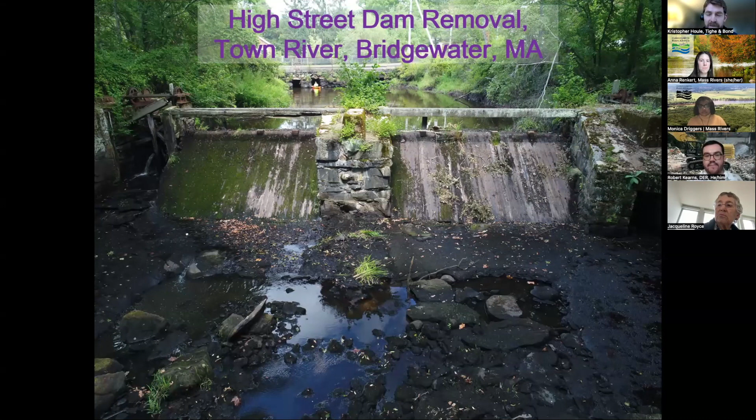Probably like many of you, when I was assigned this project early in my dam removal career, my first reaction was, how the heck am I going to figure this project out? This one had it all from a complicated infrastructure standpoint. It initially involved a willing dam owner and a strong NGO partner, but that was about it. The biggest challenge was in relation to the 1700s era bridge that was right upstream of the dam. Not to mention the building that is precariously located between the main and secondary river channels.

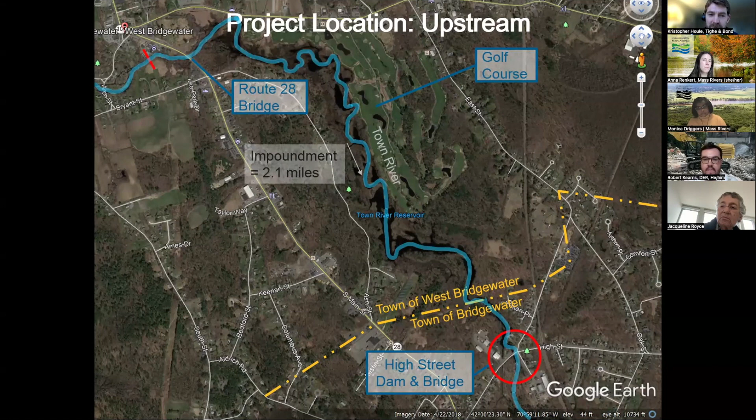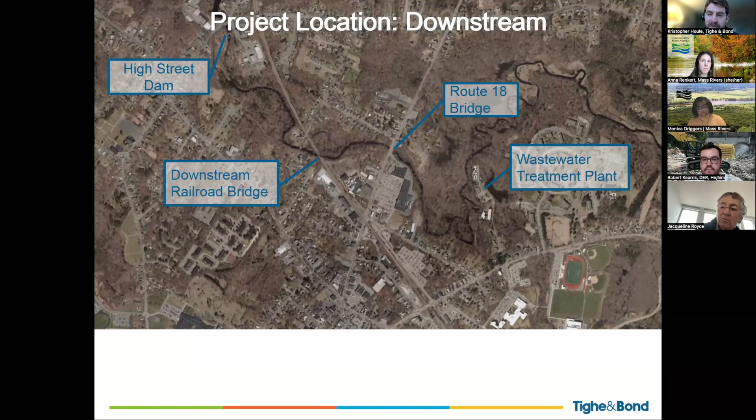In addition, there's a highly trafficked state bridge upstream within the dam impoundment, and a golf course that used water from the impoundment for irrigation, and that was just upstream. Downstream, you had more bridges, rail bridges, and the town's wastewater treatment plant that couldn't be impacted. So once again, this project had it all from an infrastructure perspective.

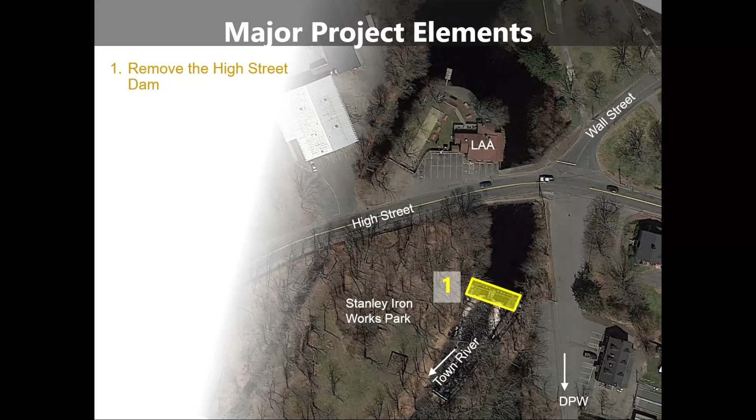So what I ultimately chose to do is break the project down into pieces and try to solve one issue at a time. Obviously, dam removal was the key focus from my perspective. That was easy. We had a willing dam owner, a private owner. They owned the business across the street, shown here with the white building. So access was well established here. We had access through the private property into the impoundment, as well as a town park and a town roadway and a parking lot nearby on the east of the dam. So access, in this case, that part was easy.

But as I mentioned earlier, the next major piece that we needed to consider here is the bridge. Understanding that when you remove a dam, you change a pond environment to a fast-moving water river environment. So in this case, it had this bridge about 150 to 200 feet upstream of the dam that we knew was going to be impacted by the project. And from that earlier slide, I showed a 1700s era bridge, all dry laid stone, and we really didn't have the town as a partner in this project yet. But thankfully, if you see the arrow on the right, the town DPW yard was located just to the east of the dam. So I thought, hey, here's an opportunity to engage the town DPW. Of course, they would love to have their bridge replaced as part of this project.

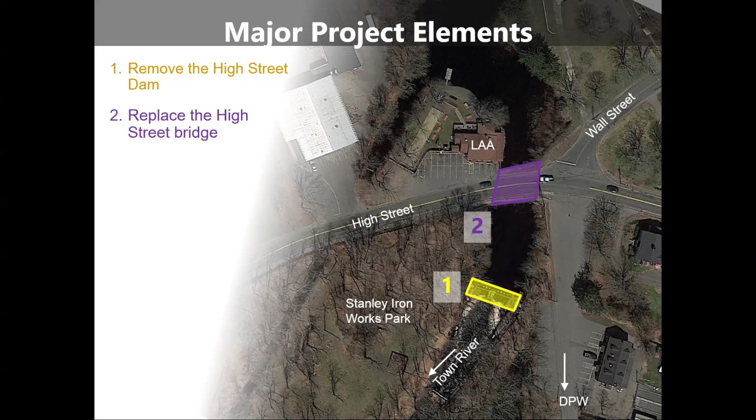Well, that didn't really get me too far. At least initially, their take was this bridge is fine. We haven't had any problems for years. Floods occasionally, but it's in okay shape, which they're probably right. With this sort of slow pond environment upstream, there weren't any major issues other than occasional flooding. So that didn't get me too far, but as with most DPWs, one issue that does speak volumes to them is drainage and potholes and utilities, of which there were many issues in High Street here. So that changed the dynamic and changed the conversation a bit. We started to speak their language of, hey, all right, if we can address some of these drainage issues in this project, then yeah, we'd love to talk with you.

So those early conversations with DPW really opened up the bigger conversation with the other entities at the town, like the town manager and planning department and conservation. So that was a huge breakthrough early on in the project of really bringing in the town support, understanding this project could not have been done without a town partner. So we had that piece figured out.

Now focusing on the building. You have this building that's located precariously between the primary river channel to the right in the photo, and the secondary channel to the left, all part of the town river. This building is referred to as the Lincoln Athletic Association. It's a business that utilizes the river for recreational purposes, fishing and kayaking. You can see a dock that they have to the north of the area, but of course it's very precariously located. The building is right up along the edge of the river, and we knew from the beginning that the changing velocities of the river were going to potentially have an impact on the building.

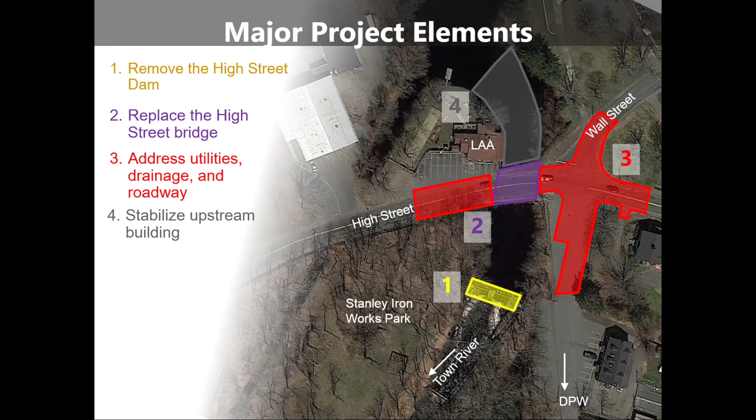And they told me some funny stories. The business also has a bar, so many of the attendees attend on Thursday, Friday nights after work. And they jokingly said that they recall many times where they'd have to go into their building and there would be water on the floor, but they'd just put their boots up on the bar or on the table to keep going on with their night and their fun.

So that was a topic where we were able to come to common ground and really make progress with bringing them in as a partner on the project as well. So that's the message there. It's just find commonalities, find those common grounds for the issues that might be a co-benefit. Your dam removal might provide some sort of co-benefit to issues that are important to them.

So with that, at that point we had a core team, and so then we were able to start establishing project goals and objectives for moving this project forward. And it's sort of changed, maybe flipped the script from the beginning, where in the beginning we focused more on those ecological things, like at the bottom of the slide, restoring the natural river processes and improving fish passage.

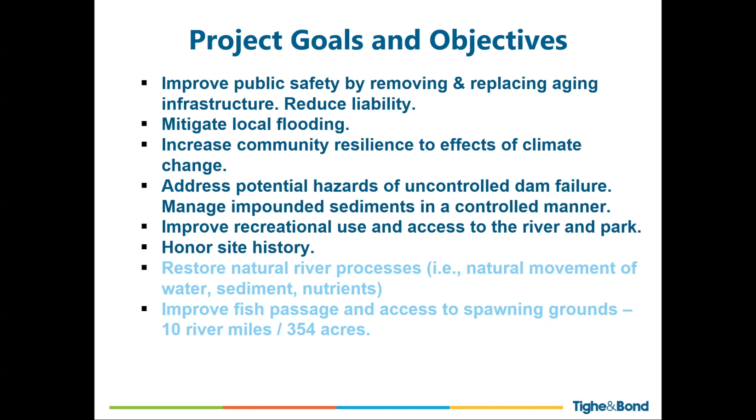So I made a few phone calls at the time to colleagues over at MassDOT, Department of Transportation, to just let them know, hey, we're thinking about this drawdown. We were going to have our engineers out to do inspections, but invited them down to come and inspect it as well, because they had only been able to have divers there previously, and they took us up on that offer. They prepared their reports that really documented some of the deficiencies on this bridge. We were able to date it back to the 1700s through some research.

And interestingly, I kayaked through one of these bridge barrels, and it was all just dry laid stone. You could look from one barrel into the next, and of course, from my perspective, it didn't seem like that was a safe bet. And sure enough, the DOT reports confirmed some of those issues, and that really changed the conversation in talking with the public as well as the town officials, that, hey, this dam removal wants to move forward.

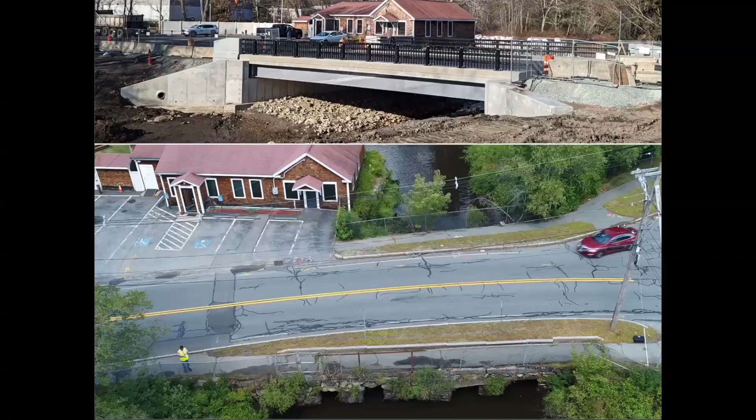So fast forwarding, long story short, here's some photos. I'm going to go through a set of photos here from 2023, 2024. We were able to replace the bridge. So the easiest way to address that piece of infrastructure is to replace it. And this bridge, I think this photo is from the fall. The bridge is now fully open to traffic, so that part was a success.

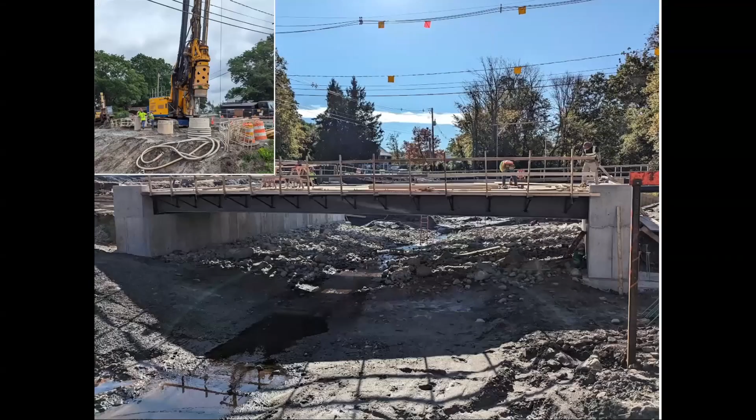A bit more focused detail of how we're addressing some of those infrastructure challenges here. So from an abutment standpoint or bridge construction standpoint, we have concrete abutments set on concrete piles that go down about 30-40 feet to bedrock. So compared to just the dry laid stone, a much more stable foundation.

We increased the size of the bridge significantly. I want to say the total span I think was 55 feet relative to several 3 to 4 foot size culverts earlier. So much more available width to pass flood flows. I think the design storm here was about a 100-year storm, and it was also sized to conform with Massachusetts stream crossing standards.

And then the other piece here is the channel construction aspects. As I talked about earlier, when you have a dam removal, you're changing the environment from a pond, slow moving environment, to a natural river environment. So we needed to dredge out some sediments as part of this project. So you had just an exposed sediment bottom. So we needed to bring back in some more appropriately sized river cobble and stone to help protect the stream bed from erosion, head cutting over time. So a few photos on that, but again, that was a critical piece to protecting these abutments and foundations well into the future.

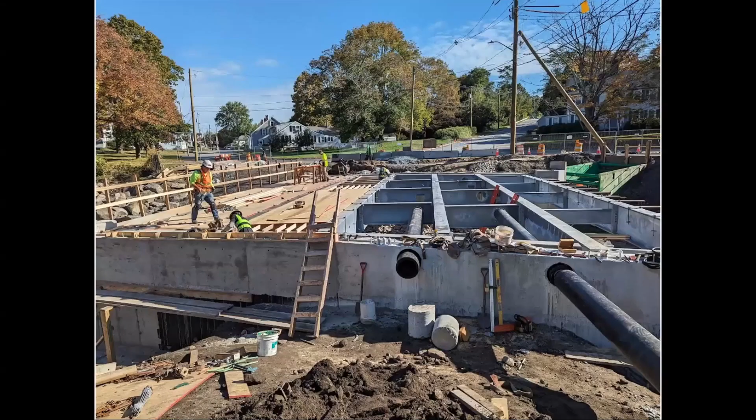I talked a bit about utilities. This was an interesting project from a utilities perspective, where you kind of had it all. You had water mains, sewer mains, gravity sewer mains, you had gas, overhead utilities. And the water main, for example, in the previous bridge was exposed. You'd walk down the sidewalk, you'd see it right along the bridge. So in this case, we're able to insulate it, put it under the bridge deck. Same thing with gas and sewer. Repair through the whole section of High Street for this project area.

And then also one item that was important for the town manager was to do this in a way to accommodate potentially putting electric service underground in the future. So it wasn't done as part of this project, but the bridge is designed in a way to accommodate it. So there's essentially an open bay that, should the town in the future for resiliency want to put their electric service underground, they wouldn't need to tear open this bridge and kind of start over. It's all built into the design. So that was kind of a neat forward thinking from the town's perspective.

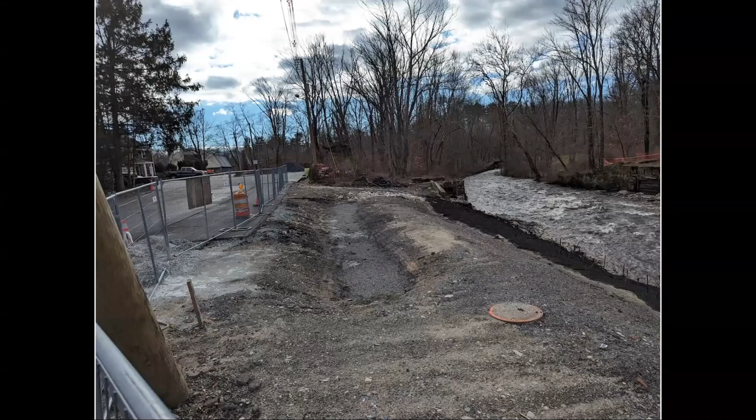Not the prettiest photo here, but I talked a bit about drainage. This was not quite finished construction, again from the winter time, but built-in stormwater improvements here to handle drainage. We eliminated pavement, created a bioretention area, improved drainage in High Street as well.

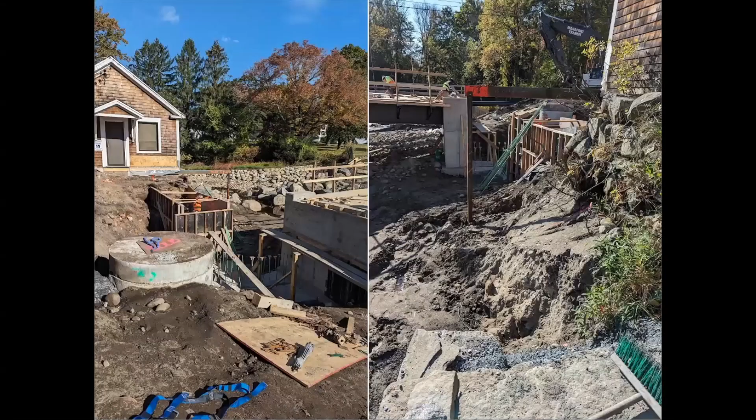I don't have a great photo of it either, but it's showing some of the safety improvements on this project here. So if I toggle back and forth on this slide, a critical piece to this project is that I talked about increasing the size of the bridge from just those small culverts to a span of 55 feet. And in order to do that, it was constrained by both the Lincoln Athletic Association building on the west side of the river, but on the east side, you have an intersection. So what we had to do was shift the intersection over to the east. And that gave us more space for the bridge.

But what it also did was create a safer traffic condition, where if I show you this image here, you have cars that come off of Wall Street and kind of come into the intersection at an angle and really don't stop. It was quite unsafe to be out there where you have people just running right through the intersection.

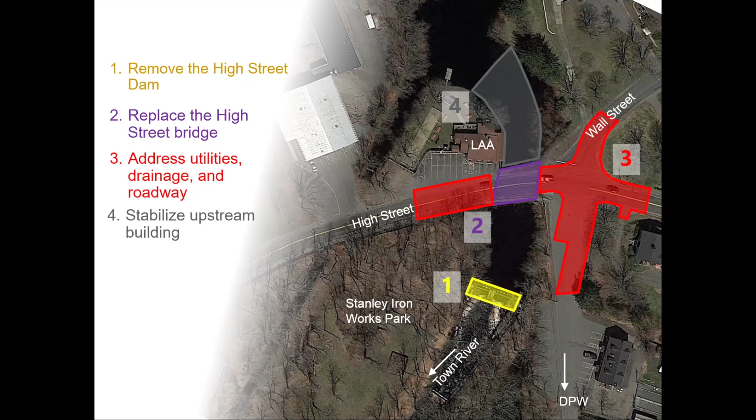So what we were able to do is make it more of a formal T, where there'd be stop signs at both locations, then pull some of that pavement away from the river and do some of the drainage improvements that I talked about as well.

In terms of the Lincoln Athletic Association building, from the beginning it was always envisioned that we needed to stabilize the building. But once we got into construction, we discovered that the foundation of the building had quite a bit of rot and termite damage that needed to be addressed. And you can see that in the photo on the left with some of the plywood there and some of the work that they needed to do just to repair the building.

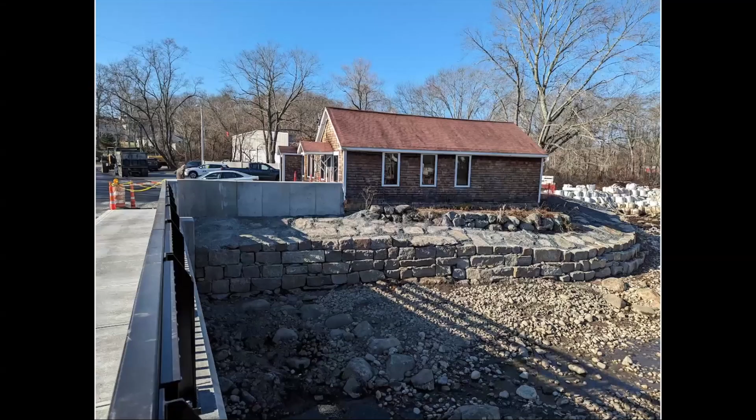So looking at the building from the outside here, with the arrow I'm pointing out the original stone wall, so essentially the edge of the river prior to the project. We were able to shift the river over several feet with the construction of a new revetment. So we essentially didn't touch the old revetment, just built out from that. So that helps protect the building.

But then going back to the earlier conversation with the bridge wall, the wall that you're seeing in the photo ties into the foundation for the building, as well as the new wall on the river. So this was an interesting piece to it. Otherwise, in most cases, you would have had a wing wall coming off, but that wing wall would have actually prevented access into the building.

So the engineers doing the bridge design actually came up with a very unique kind of 90-degree design here that, again, tied into the building foundation, which required quite a bit of extra approval with MassDOT, but was really the only option to do here in order to make this project work. And I think ultimately it was a pretty creative design.

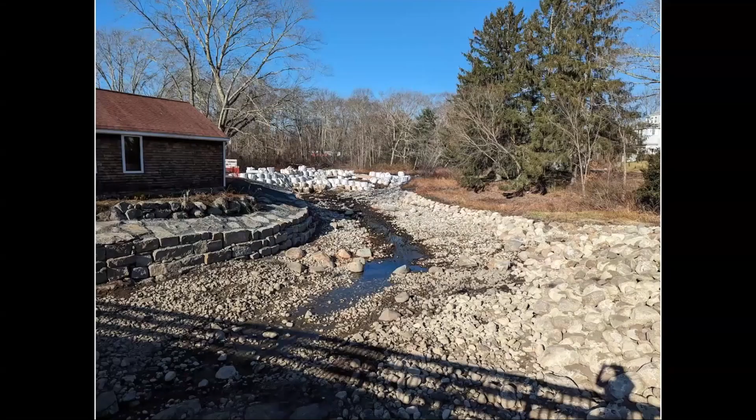Just another photo of the wall and then the river before it was put online. You see some of that riffle construction, channel construction that I talked about earlier. Here's a photo with the river online. I was lucky enough to get out here the day that the cofferdams were pulled, so I got to see the river flowing freely for the first time in January. So that was fun.

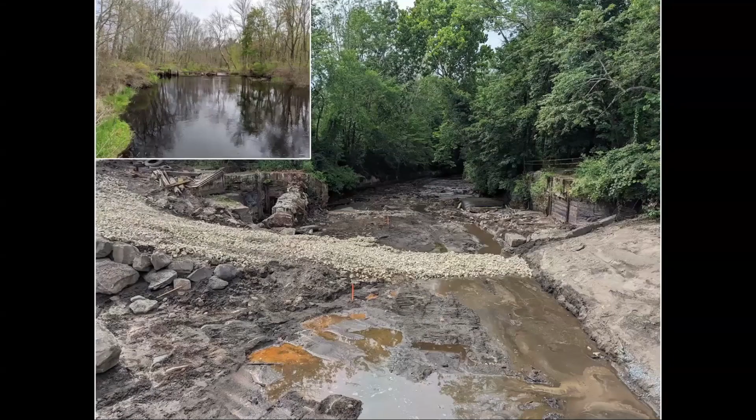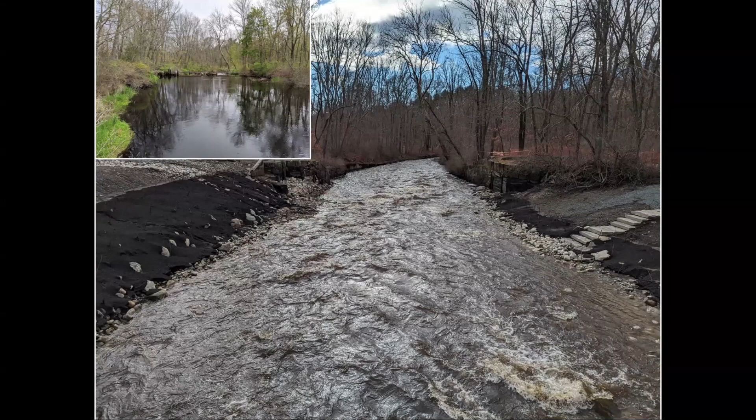And of course we did a dam removal, right? I spent all this time talking about this. We did remove the dam. The photo on the left in the corner is just the pre-dam condition. The dam was out last summer. And then this was the river flowing freely in January.

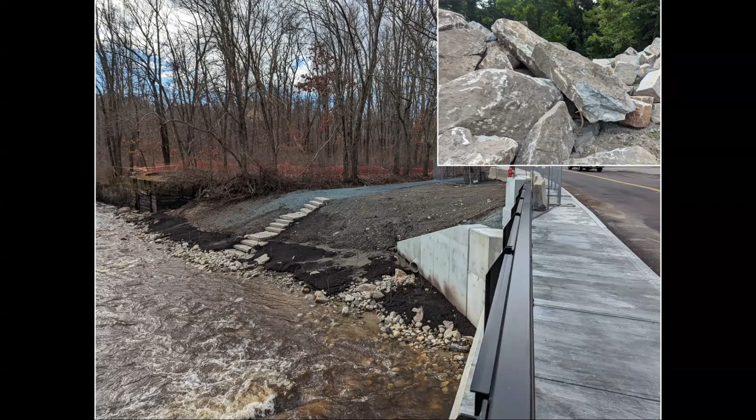And the last piece on this project, kind of a fun aspect to it, was increasing recreation and public uses and honoring some of that site history. So here a portion of land was actually privately owned by the dam owner. They had a small sliver of land on the west side of the river that they had for access to maintain the dam. So they actually agreed to donate that to the town and expand the town park.

And then we had proposed this river access point for a kayak launch and canoe launch, which did not exist at the site prior. And to build it, we actually reused some of the 1700s era cut stones that were used to build the original bridge after pulling those out of the dam. So that was kind of fun and a good way to honor the site history.

So in recap here, the timeline of the project lasted about 8 years, starting in earnest in 2016, wrapping up this year. It began as just a private dam owner wanting to remove their dam, but ended as a public infrastructure improvement and resiliency project. We focused on the infrastructure complexities to expand the partnership and gain broader public support for the project, and those technical challenges really became the opportunities to attract broader support and funding for the project.

I know I have not listed everybody here, but highlighting a few of the partners and funding support here. The White House was a huge supporter for this. The Department of Interior, the Secretary of the Department of Interior actually came to the site. We had received funding through several of the recent laws and acts, infrastructure acts, strong support from federal agencies, Nature Conservancy, of course, and other local NGOs, and a variety of state agencies, including DER, MVP, EEA, and of course the town of Bridgewater.

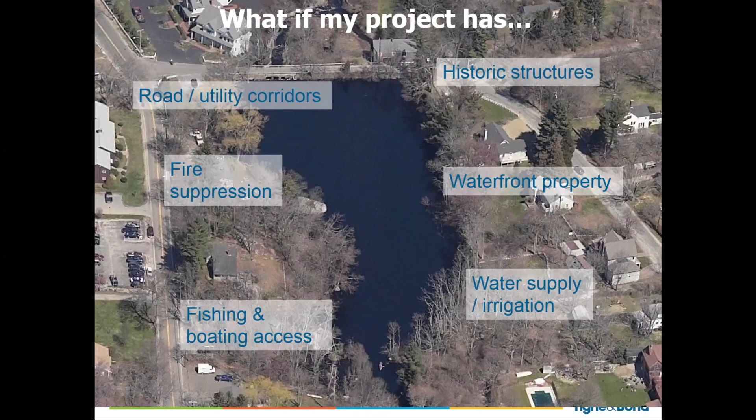Well, I have a few examples to run through to try to touch on these, but my take-home message here is at that project scoping phase, you really want to be thorough with your early site reconnaissance. So zoom out, take a 10,000-foot view of your project area. Consider the site in the context of the watershed and the historical context of the site. What purpose did this dam serve not only currently, but in the past when it was originally built? How did that fit in the industrial context of the area?

Investigate the upstream and downstream infrastructure. We covered that pretty well in the other example, but understand those existing impoundment uses. Confirm site ownership. That's a really critical piece. You might have a great idea and a great project, but if you need to access private property and they're not on board, you want to engage them early and think about alternatives if you can't access the site in the way that you might envision.

And then along the site access lines, a lot of these dams are in walled rivers, dams that have been here for hundreds of years. So you need to think about how you're actually going to get your machinery down in the river to do the project. And then lastly, I'm not going to cover sediment management too much because it is another presentation later in the series, but you do want to characterize and predict how sediment might move as a result of your project.

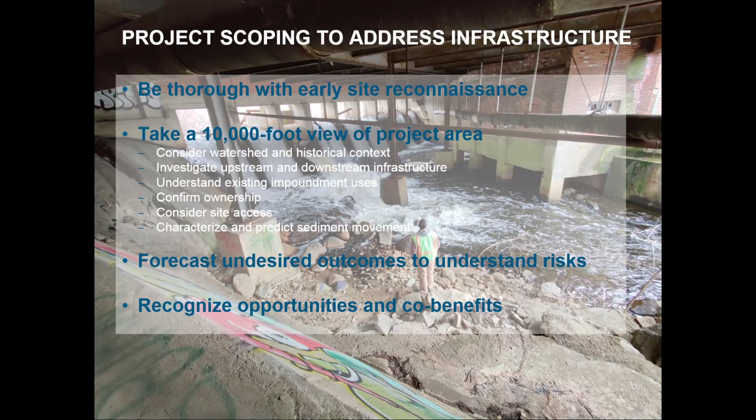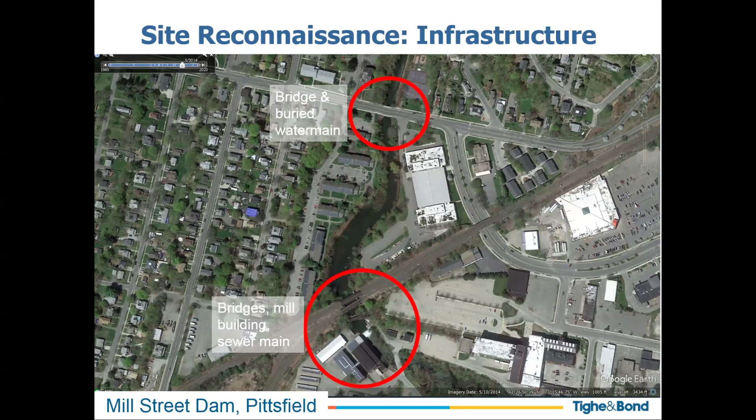So just a few quick examples here before I wrap up. This is a dam removal site out in Pittsfield. Similar to the previous example, we had bridges upstream, rail bridges, we had public roadways. At the upstream bridge, there was a water main buried through the river that needed to be protected and could not be moved. Of course, we had the mill building nearby, and an additional sewer main downstream. This project wrapped up in 2020. So just a few snapshots on how we addressed some issues here.

So we built a constructed riffle to essentially backwater the bridge and the utility water main that was running in the river, to kind of mimic some of those low energy environments that the dam was providing.

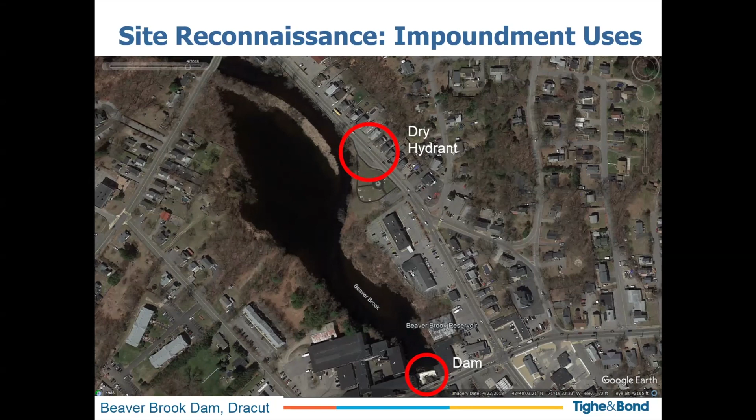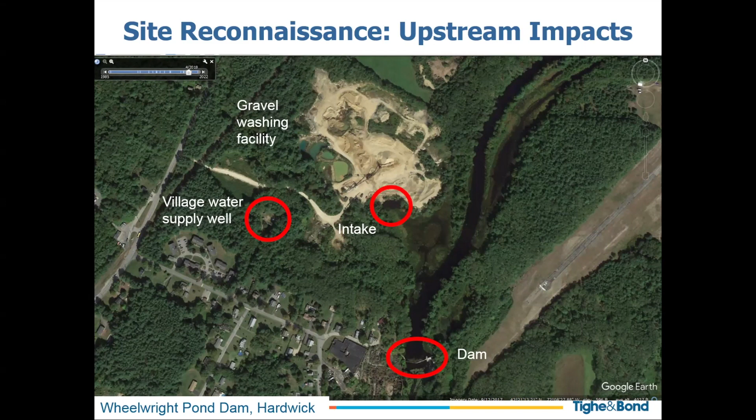Similarly, there was a gravel washing facility upstream that pumped the water from the river to essentially run their business, and removing the dam and not addressing it would put them out of business. So same thing, bring these entities into the conversation early when you have issues or factors that are going to negatively impact these upstream users.

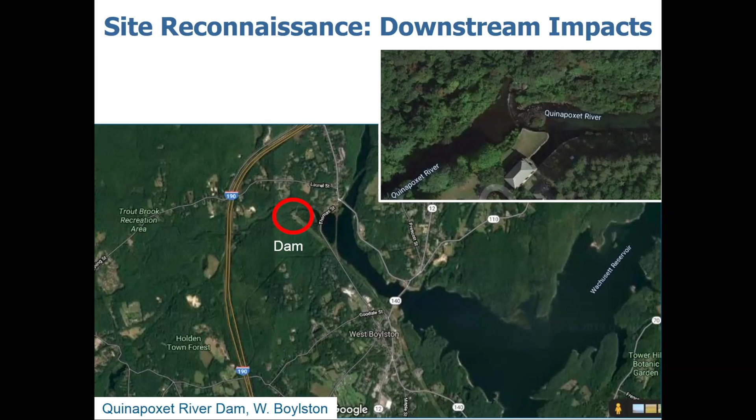And lastly, downstream impacts. We talked about some of the bridge related things, but just zoom way out. What is downstream? In this case, Wachusett Reservoir, water supply for Boston and Boston suburbs. Sediment releases in this case could and would impact water quality, which could have a huge impact for water supply. So just want to be thinking about your site relative to the broader watershed context.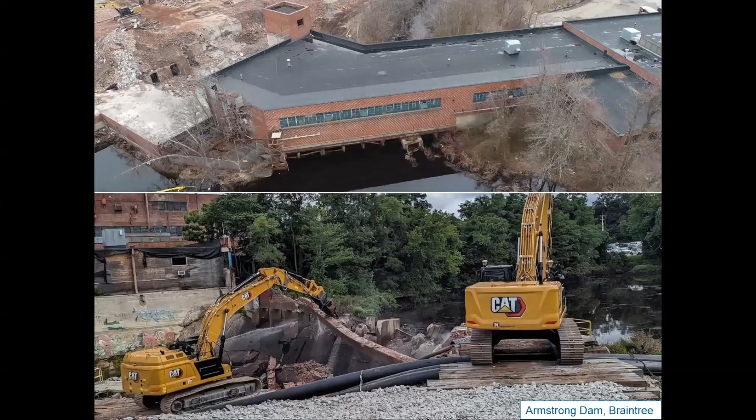And I think that's my last slide here. It's a fun one. Here, the photo on the top, the dam is actually under the building. You can see the dam being removed in the bottom picture, but what easier way to address the infrastructure? Just remove it all, right? Not really possible in a lot of projects, but very creative solution here.

So with that, the take home message is don't let perception of difficulty discourage project progress. Seek guidance from others, whether it's hiring or talking to an engineer, or just talking to people that have maybe been through a similar scenario. There's a lot of experts doing talks in this series, so reach out to anyone to see how they dealt with issues on their project. You want to identify and highlight those community benefits. That's a great way to get public support for your project, really engaging the community and making it their project in addition to your project.

And then turn those challenges into opportunities. Just because there's a difficult piece of infrastructure doesn't mean it's impossible. There's usually a way to engineer a solution, and at the end of the day, you might have a better story and be able to engage more stakeholders and partners.